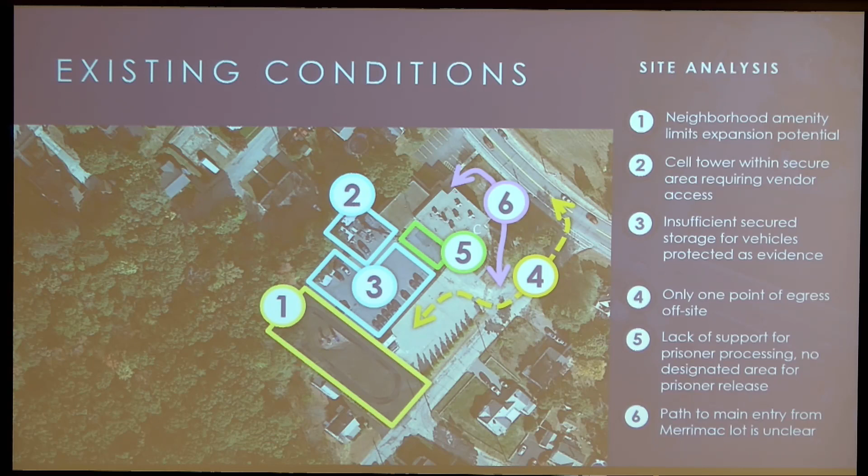But I think the bigger story here is about the condition of the building envelope. There's a document in our report prepared by our structural engineer expressing a lot of concern about the condition of the veneer. If you see the stone sign, the Bushee School sign, it's displaced from the vertical plane of the wall by a couple inches, and the masonry joints below are opening up. You also see evidence of the copper cornice pushed away from the brick, and cracking in a number of joints throughout the facility.

It's the opinion of our engineer that likely the header courses that tie the wythes of brick together let water get in, freeze, and break those header courses, so the veneer is no longer securely attached to the backup wythes. There's concern about the stability of that exterior brick veneer, and his recommendation is to do repair everywhere around the parapet, and in a lot of locations rebuild that exterior veneer and install new anchors to tie the wall back together.

Typically in these older buildings, you're looking at a three-wythe wall, three layers of brick deep, all bound together with header courses. In our case, it appears the outer wythe is no longer bound to the inner wythes, so that needs to be tied together. I'll point out there was a previous study, I think from 2007, that had already recommended the use of helical anchors to tie these walls back together. So this has been a problem for a while, and the displacement is concerning.

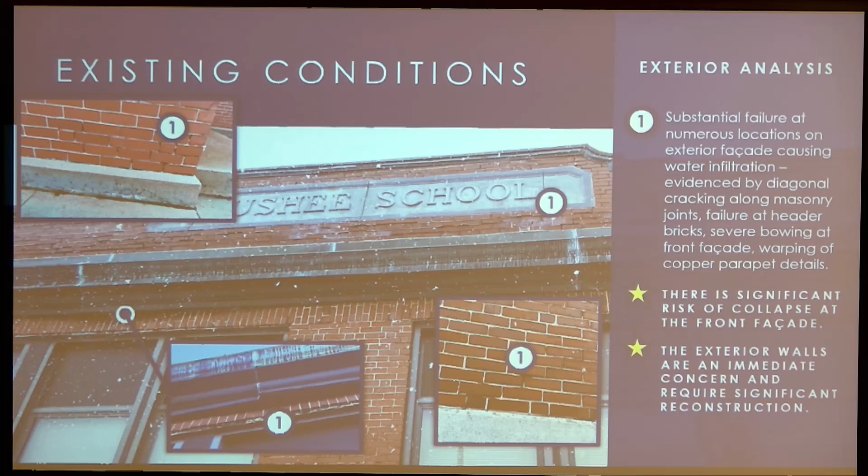Other envelope issues have to do with age and condition. You can see a mismatch of window conditions around the facility. There are aluminum windows that were clearly replacement windows at some point in the past; those are outdated and no longer meet current energy standards. Some other windows have been infilled, and we have single pane windows that aren't terribly energy efficient. We also see signs of rusting on some of the lintels, consistent with moisture infiltrating between the wythes of brick.

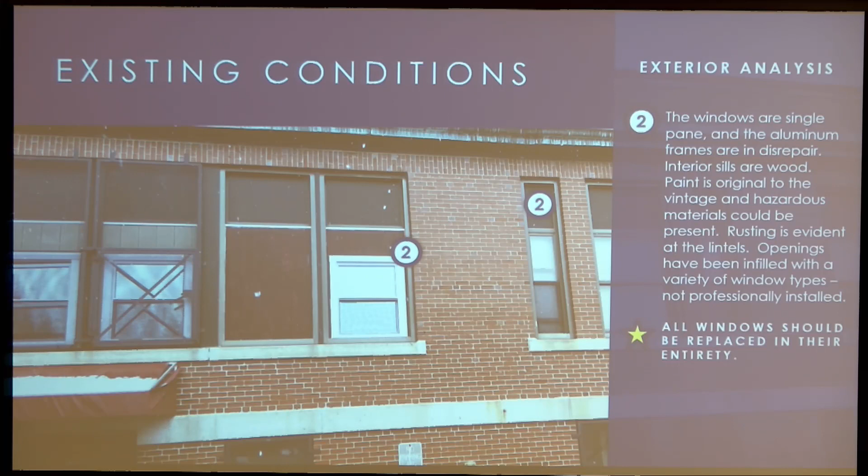We have interior wood window sills with a lot of peeling paint, and we see the same thing on some walls and ceiling locations, indicating moisture infiltration has occurred. When we get up on the roof, we see that at some point the rooftop units were replaced. You can see in picture number 3 where there was a larger curb that now has a smaller unit; these are still older units but clearly replaced in the past. There's deterioration in the gravel and roof conditions, and around the roof hatch you can see a fair amount of deterioration in the flashings, which occurs at a lot of the penetrations.

I leaned over where that Bushee school sign is, and you can see a lot of deterioration in the flashing and the caps along the edge there. You can actually see the displacement in the brick veneer pretty well from that location.

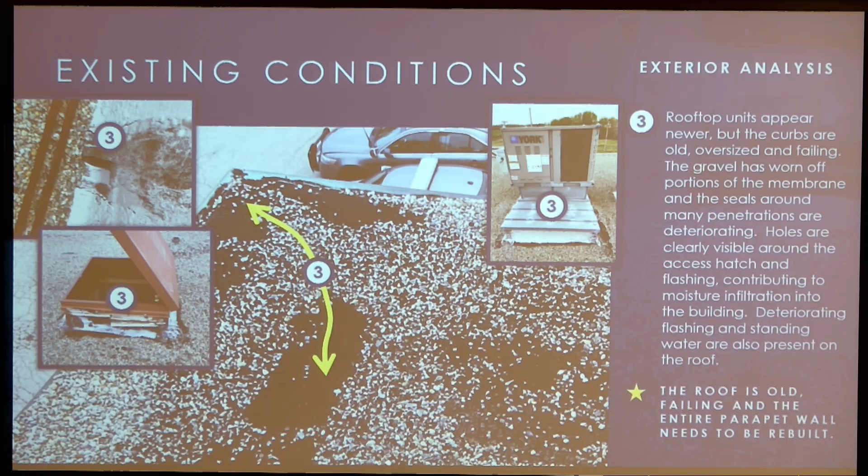So we're potentially looking at the need for re-roofing. We're looking at replacement windows. We're looking at masonry repairs. So there's a lot of work required on the exterior envelope of the facility.

Once again, getting on the inside, I mentioned that we do see signs of deterioration and infiltration from water. On the inside, in some cases, it just results in the peeling paint that you see in the one image. In the big background image, that is likely a combination of not only water infiltrating the masonry, but also site water up against the back wall.

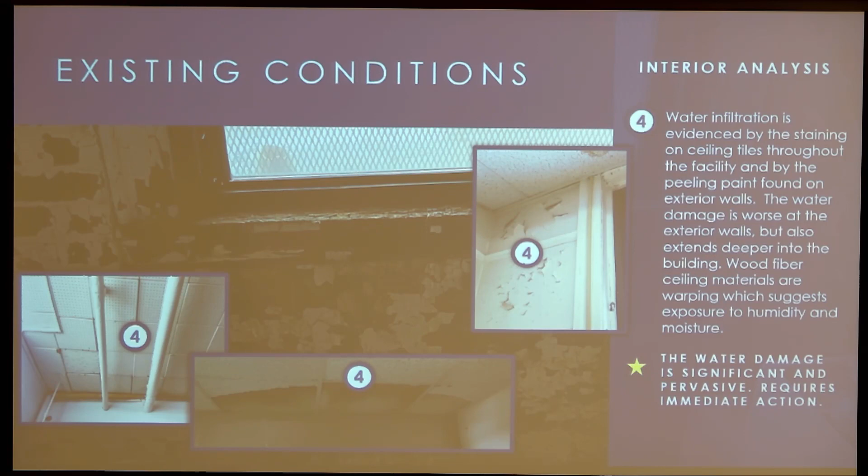So you see some pretty serious paint peeling on that wall as a result of all that infiltration. You see some big water stains on ceilings. You see the wood fiber tile in what is now the fitness room delaminating. So we've got a lot of indication of moisture infiltrating the building in the past.

We also see a variety of worn finishes throughout the building. There's one image of the chair underneath the dispatch desk where a previous reflooring took place, but now that is wearing through. We see some wooden door sills that are deteriorating. We see indications of vinyl tile over wood flooring where the joints are cracking and the tile is cracking. And then down in the lower left corner, we see some 9x9 tiles, which may indicate the presence of...

Yes, sir. Is the air quality okay in the fitness room? Is the air quality okay?

Throughout the building, there is some sign of moisture infiltration that could result in mold buildup. We did not do specific testing to verify whether that's present. The last one I was talking about, the lower left, is probably or possibly the presence of asbestos-containing materials in that 9x9 tile.

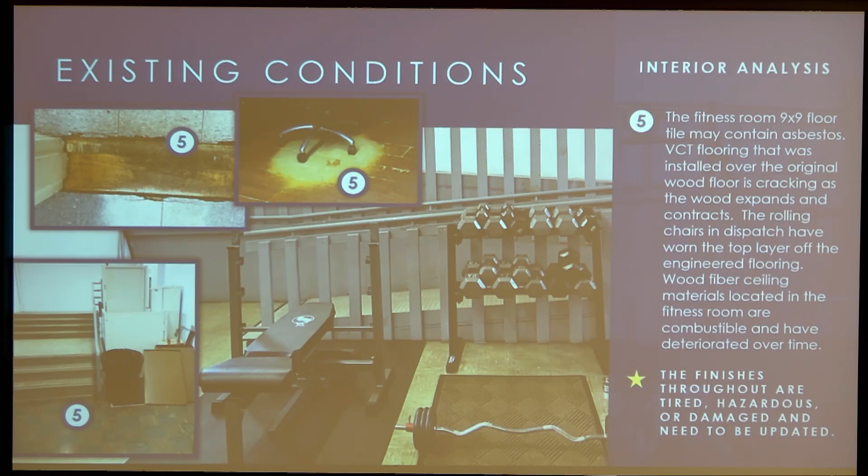In general, we see detention facilities that are older, and they don't have the kinds of provisions that we normally look for in terms of prevention of self-harm. It is unfortunate that many detainees, in the first 24 hours after apprehension, feel like it's a big blow to their psyche, and there are a lot more attempts of self-harm during that period. So trying to create a safe environment for officers to maintain that custodial responsibility is really important.

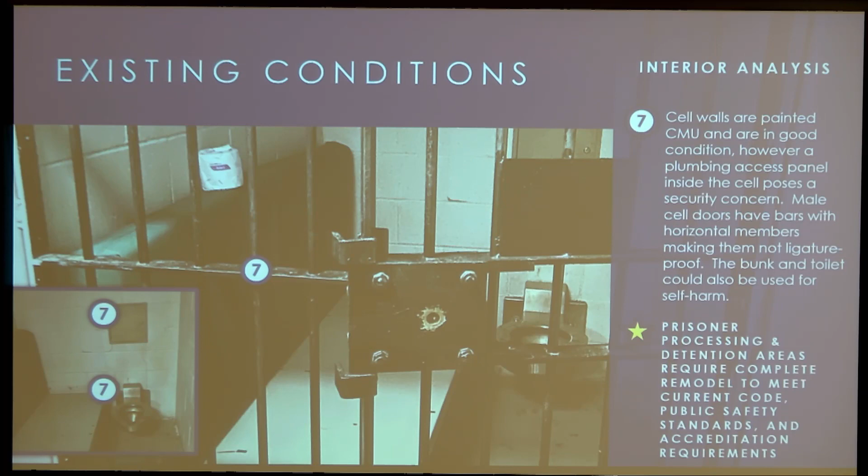All right, so some of the key takeaways: as the police facility stands, it no longer suits the needs of the department. And of course, I've outlined some of the challenges that the building itself faces.

We have some programmatic separation issues, particularly with the detention area. We have some challenges with building and site security, functionality of some of the spaces. Certainly ADA accessibility is a significant issue in the building.

We didn't outline it, but you walk in the front door and the first thing you're faced with is an up and down stair. And then that continues because there are several levels throughout the building that are not properly connected with either ramps or elevators. So ADA accessibility throughout the building is challenged.

There's concerns about officer health and safety, with some of the conditions we're facing with moisture infiltration and potentially hazardous materials. There's some building code issues that should be addressed, and certainly some efficiency issues that need to be addressed. Interior environmental quality, because of a lot of that moisture infiltration, is challenged. And then again, the prisoner health and safety, which translates into the custodial responsibility for the town, should be addressed as well.

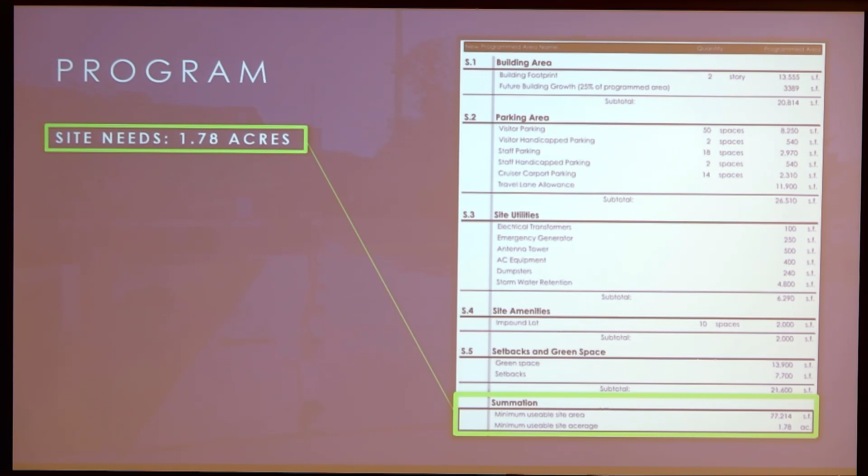The public areas, which is the public lobby and restrooms, access to an interview space, as well as the interior vestibule. We have training community space.

In your case, the community training room is also set up to serve as the municipal court. So it's larger than it would normally have been for just police function itself. It can handle the peak loads of the municipal court. So we've got those functions as well as some storage and kitchenette space to support that.

We have some municipal court facilities, which is the staff office and the judges' chambers. We have the dispatch center itself, and we program those to be compliant with NFPA standards for emergency communications centers receiving calls from the public, which calls for a specific level of protection against fire protection as well as security.

We have a records bureau, which houses all the records that the department retains, department administrative offices, investigative space, property and evidence storage - again, looking to fulfill accreditation standards for those requirements.

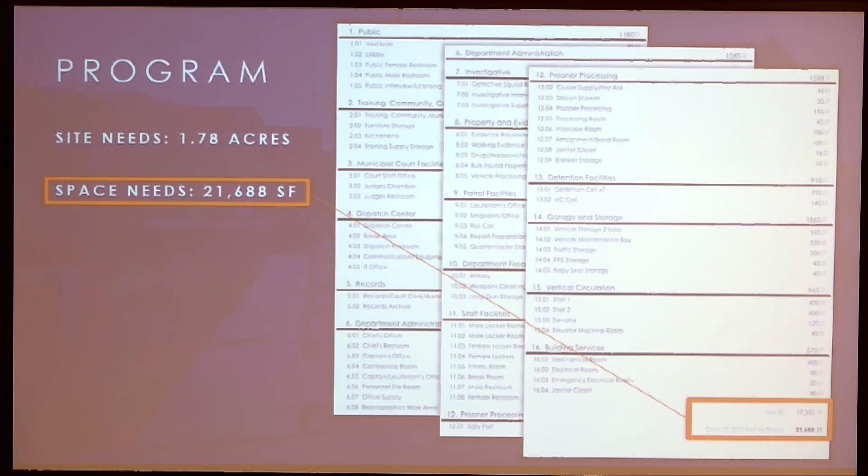It was not a part of our study to evaluate alternate sites, but we did have conversations with the police department about the location of the existing site within the community. And the chief has indicated to us that the facility, in his opinion, is located in an optimal location for the high volume call area.

So a lot of the calls for service are proximate to this site location, which makes it a great area for responding and putting a presence - police facility presence - in an area where most of your call volume comes from.

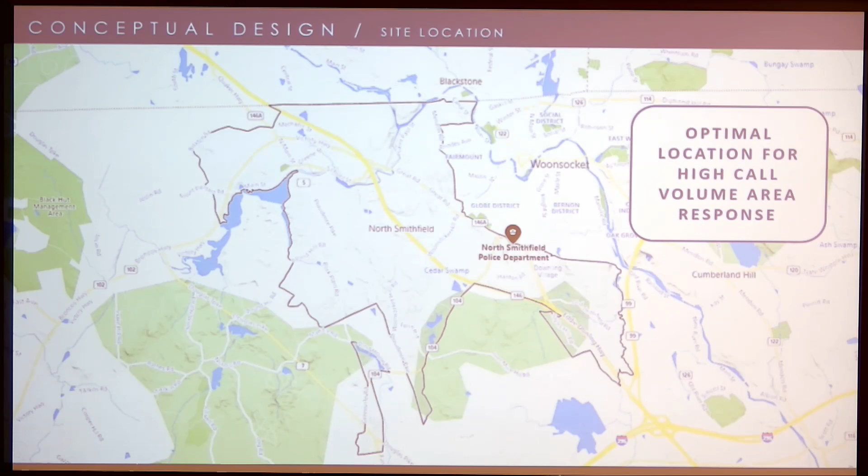All right, so now we're going to take our first look at the conceptual designs. This proposal is for the addition renovation.

The idea here is that we are going to retain the existing building and renovate it so that we can utilize that space. We did actually end up doing 2 additions to try to solve some of the programmatic issues. Right now your building is about just shy of 15,000 square feet. The program resulted in a need of 21,688, so we're a little bit shy of the programmatic need from a square footage standpoint for the existing building.

One of the things I'll tell you about existing buildings, particularly ones that are schools, is they're not the most efficient buildings to design a police station into. In particular, among other things, there are the widened hallways. They eat up additional square footage in the circulation category that isn't necessarily what we would have done if it was a purpose-built construction.

So our first challenge in looking at this site was trying to identify how to handle the vertical circulation. We wanted to address the public access to the building, and you can see up at the upper right of the page where addition 1 is - that is our main public entry.

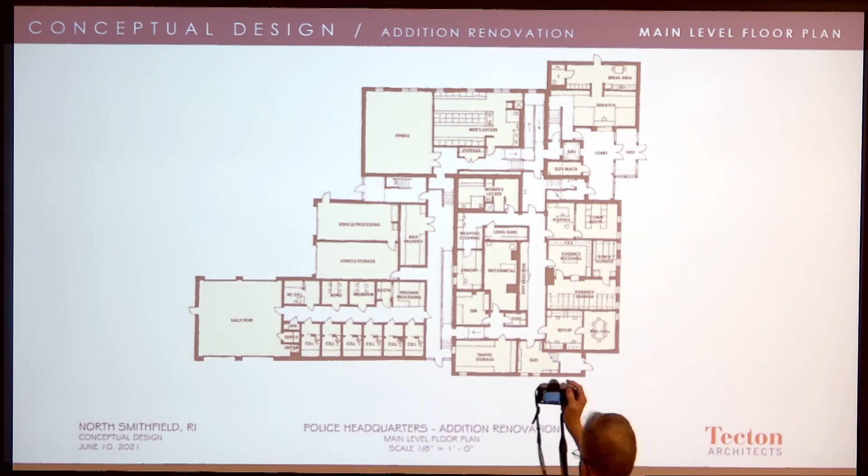This is a little difficult to see, so I'm just going to give you the general flow of it. Up in the upper right is our main entry with our dispatch area. The elevator is straight in off the lobby, bringing you downstairs to a mid-level, and then we have a ramp that drops you down to where the male locker room and fitness room are, in the back corner. Also from that half level, we have access to the women's locker room, which is in the other part of the basement.

Continuing down the page through that hallway, we have our patrol facilities and evidentiary storage down at the front of the building, and our roll call and report prep down in the lower right. Heading back, our mechanical and electrical room still exist in the middle of the building where they currently do, although we tucked the armory into where the current men's locker room is.

We do come out the back. We have to address that ramp that's too steep, so we flatten that out and continue up to get to grade with a longer ramp. And then the big rectangle at the lower left comprises all of our cell blocks as well as our sally ports. We have a 2-bay vehicle sally port so cruisers can enter, secure the doors, secure the weapons, and bring detainees into the facility in a safe environment.

And then just above the cell block are our vehicle maintenance and processing bays. One of these bays is for routine maintenance of the cruisers. The other is for when you have a vehicle involved in a crime and need to process it for evidentiary reasons — this space is not only to secure it, but to conduct that vehicle processing.

Up on the upper floor, if you go back to the elevator, you come up the half level. We have a secure public space on this upper level with a hallway that runs to the back where we create that municipal court/training room. We also have our public interview space, and public toilets are located at this level. Heading back, you get access to our records bureau, and then there's a secure entry point that brings you into the department administration, the investigative bureau, and then our patrol supervisors' offices.

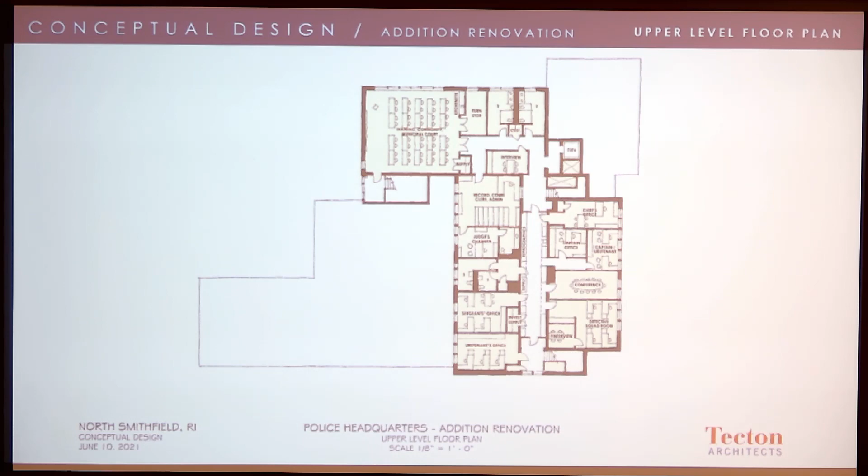So again, the challenges from the police department standpoint are that half level for dispatch, the fact that our supervisory offices are upstairs directly over our patrol functions below, and the need for all of that excess vertical circulation in the form of ramps. We could have solved that with a second elevator, but those of you who understand facilities maintenance know that a second elevator is a cost gift that just keeps on giving — there's maintenance, inspections, and all of that, which are quite expensive for elevators.

So this is a rendering of what this might look like, and you can see that we create an identifiable main entry over to the right of the image, and then complete the restoration of the existing building, trying to respect the historic character of the building and restore it as much as possible to its original aesthetic. The new addition complements it with a little bit grander entry element to identify that public entry.

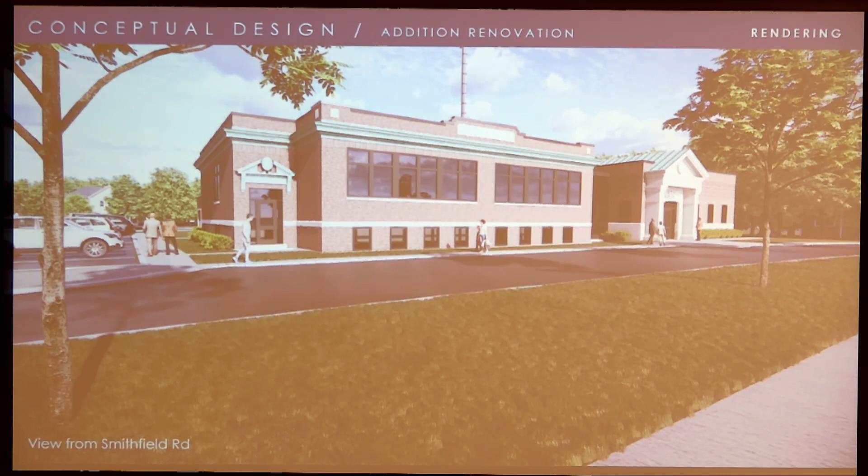Oh, did we go too fast for you there with that camera?

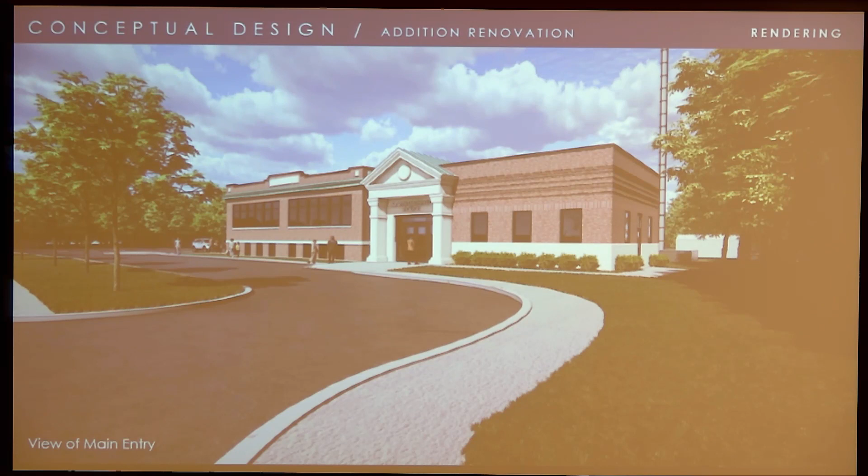Here's another view of that entry drive that comes in at the upper end of the site from where we were looking. You come right in looking at that main entry point. The parallel parking is off to the left where those pedestrians are walking by. You can still see that cell tower back behind our addition, along the property edge.

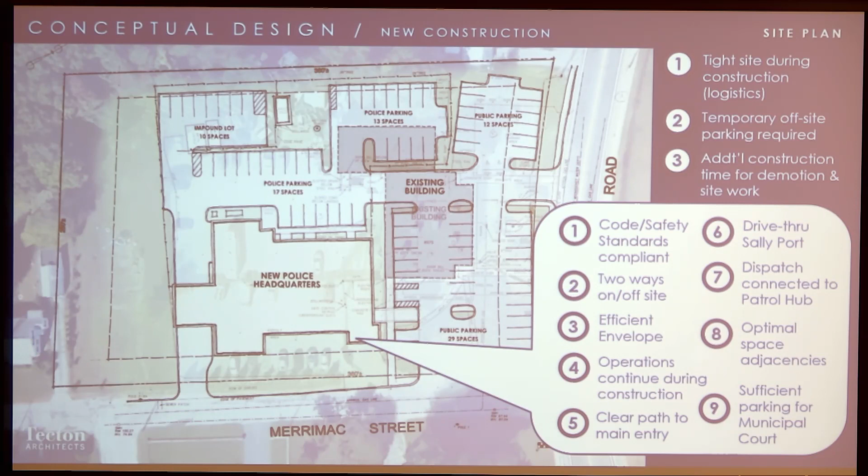All right, so now we're going to look at the second option. One of the big things we talked about here is... so on the last one, where would any handicap parking be? Can you take me back to the site plan, please?

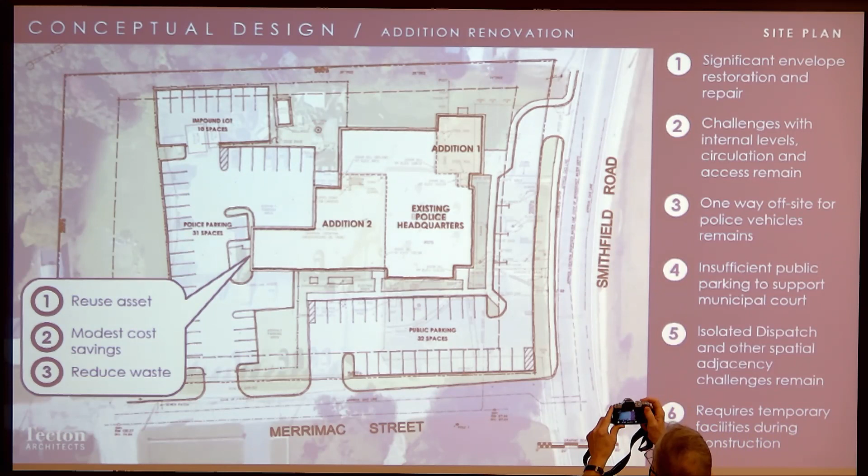So we have a couple striped out handicap spaces. We can actually get some closer to the front door. Our parallel parking can also be handicap accessible, and we can have a curb cut there.

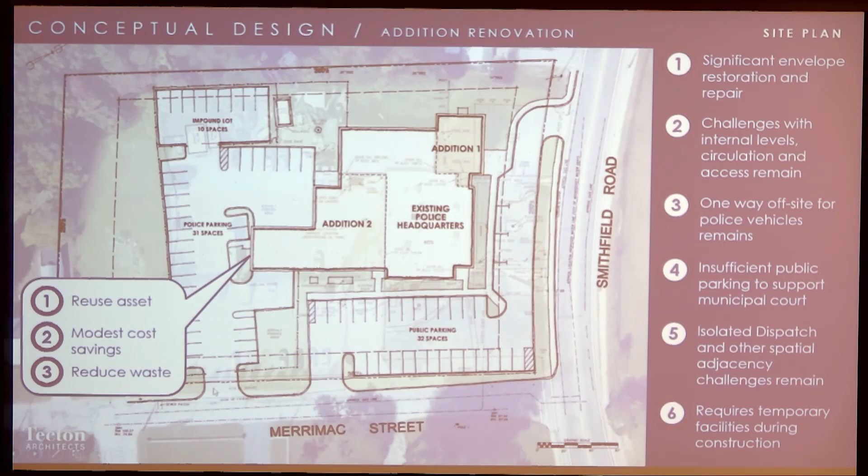Hi, so you're talking about potential Merrimac Street being blocked up on Smithfield Road. It follows up on the Councilor's question about parallel handicap parking. Would that not be an emergency exit or entry? Is it going to be wide enough to facilitate if cars are parked there? Can vehicles come in and out through the public parking space heading north towards Smithfield Road?

Yeah, that whole driveway is wide enough for two-way vehicle flow. We just didn't have quite enough depth there to get perpendicular parking along the front, so we retained just the parallel parking for quick drop-off and access to the building.

So if I was still on the addition renovation, may I ask another question? It's difficult to see, but there were two bays. One was for processing potential crime vehicles, and the other was for maintenance. That's correct. Currently, the town does maintenance of police vehicles at the highway barn.

I was just curious, if we're looking at costs, if they were to be maintained at that building, would we have to hire another mechanic? No, these are very small maintenance tasks, like headlights, windshield wipers, and stuff like that.

And who would perform that maintenance? The individual officers do, sure. Detective Steve Donner, if he's not there to do it, a lot of the guys know how to do it. Okay, thanks.

Any other questions while we're on that one before we start on the other scheme?

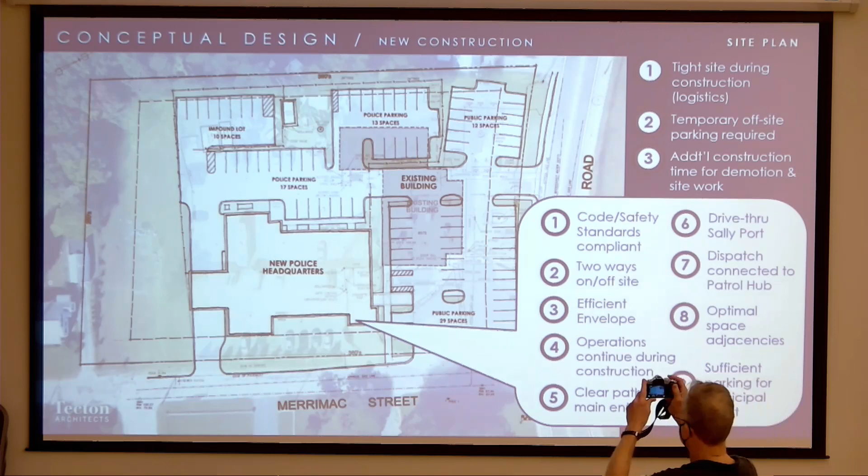All right, so this is the new construction option, and what we wanted to do here is try our best to make it such that the existing facility could be operated during construction, so that we didn't have to do a temporary facility. We're close to that, but there will be a couple little challenges for continuing operation.

Our prisoner access right now is through the back of the building, as I pointed out earlier with that green rectangle. So we've talked about other options for bringing detainees in during the construction period with the police department. That gray area is the footprint of the existing building. Rebecca, if you could just show us roughly where that prisoner entry currently is, right back there. During construction, we will have to reroute to either the other access point or the one at the bottom of the existing building image.

In this case, you see there's a more centralized access point with a perpendicular entry road that is wide enough to meet capacity for two-way traffic. We extend our public parking area all the way across the front of the site, getting upwards of 42 public spaces, so we get more public parking to support the municipal court function in this solution.

If you continue from the drive, you eventually come to a gate that allows access to the rear secure portion of the parking, where you'll have your police parking. There's a lot that jogs up above with additional staff parking, and then of course the impound lot Rebecca showed us a minute ago. The antenna sits between those two lots.

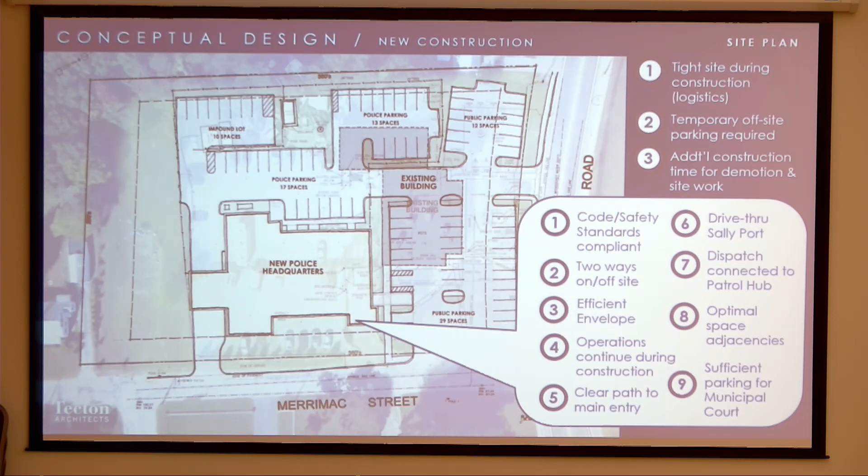There will be a little bit of additional construction time because you're going to build the new building, move in, and then go back and demolish the old building, and then finish all your site work development. So rather than building everything all at once, you've got to do it in steps. That adds a little to the construction time.

We were asked to address what's the possibility for future growth. I want to point out, through our programming exercise, we included growth inside the building. There are places where we have additional space for future needs, and certainly from a locker standpoint and a patrol standpoint, we've accommodated some future growth in the building.

So the idea that you may have to expand the footprint is a ways off into the future, but things can change over time. Possibilities involve the relocation, replacement, or removal of that park asset, indicated in area number 1. It could be possible to relocate the municipal court at some point and repurpose some of that space, or to consider acquisition of adjacent parcels.

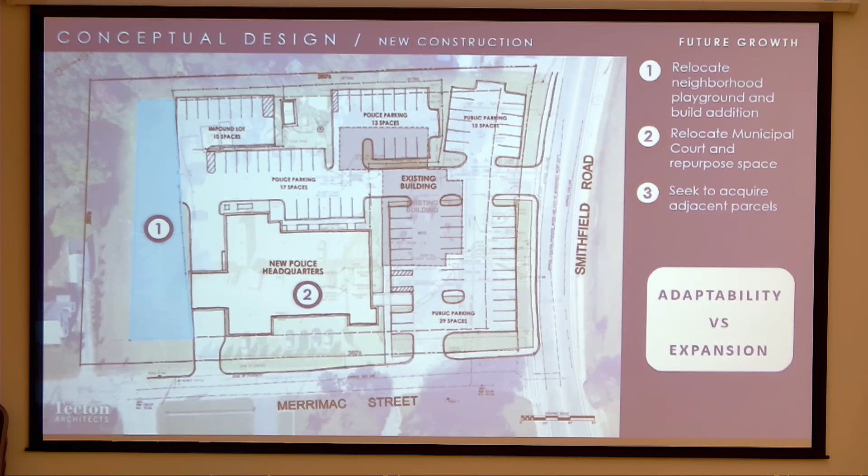Yes sir, just a quick question. Back when they were rebuilding the new state police headquarters for Rhode Island, what they did was put in double wides, right? They put everybody in double wides so they could knock down the old building and build the new one at the same time, and that saved a lot of time.

It would absolutely save time, but obviously you have the cost of the rental of those units. We didn't price this one using the temporary facility, but we could easily adjust that and figure it out. The cost might outweigh it, or you might save money in the long run since you're moving the project along a little faster.

Yeah, I mean, you know, I'm not telling you your job, it's more of a question than, you know.

My gut is they're going to kind of balance each other, because the cost of the rental for those temporary facilities for that extended time, you're going to have to locate them off-site. You have to have a place to house that for the interim, and make sure you have access to utilities. You are, however, going to save on the general conditions because the contractor, for all the time his trailer's there and his staff there, that has a cost as well. So we could take a look at it, but my gut says it's going to balance out. I don't think you're going to see a huge advantage, but I'm happy to run the numbers.

Yeah, well, if it balances out, and you get it done quicker, then it's a win, right? Yeah, well, I'm just asking, that's all. Sure, yeah. Thanks. You bet.

All right, so quickly from a floor plan standpoint, the main entry, Rebecca, point to that for me please. There we go. You have entrance through a vestibule into the lobby that has immediate access to the dispatch center. Dispatch center is supported by its break area and restroom. We have the elevator off the lobby and a stairway that feeds upstairs, and I'll tell you a little bit more about that when we get upstairs.

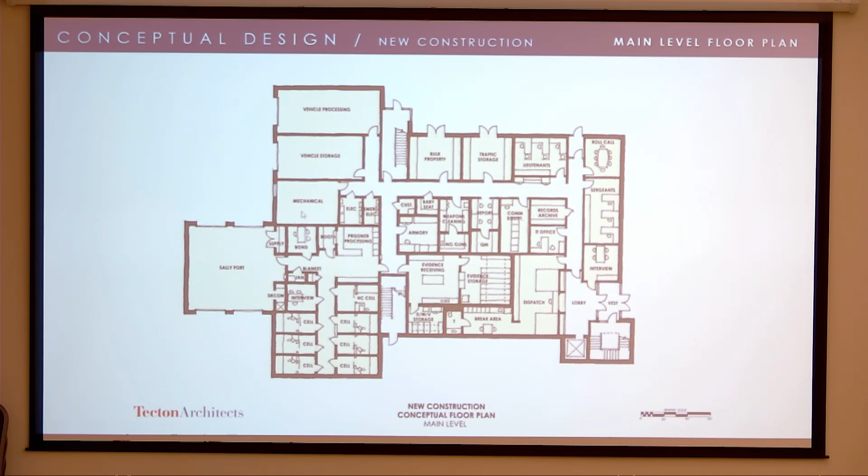So over in the lower left, our whole cell block with our detention cells and our processing area, our interview room, and then of course our access from the two-bay sally port over to the far left. Heading up above that detention area, you've got your mechanical room, and then the vehicle storage bay as well as the processing bay, maintenance and storage.

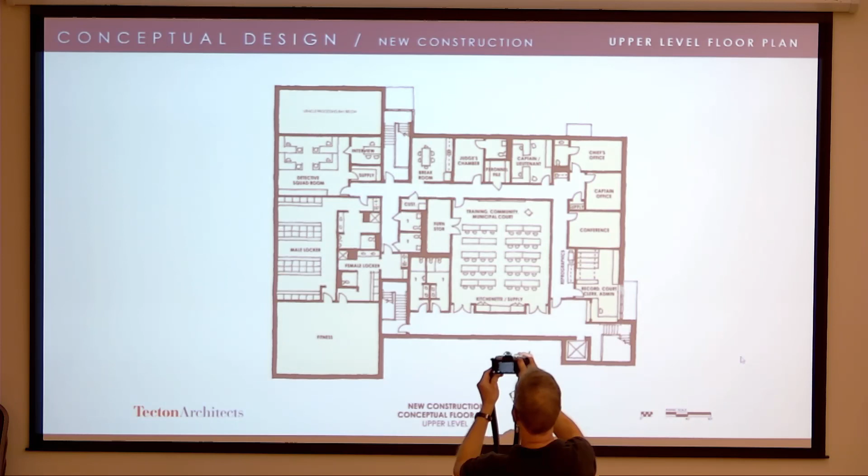If we head upstairs, once again, a lot of times what we like to do when we design police facilities is try to keep all of the public space on one floor. And if the site was a bigger site, that might have been a possibility here to explore. But because we were limited in the amount of area for the footprint of the building, in order to get a stacked floor plate, we decided that it was going to be necessary to get that municipal court up above, similar to what we did in the addition renovation solution.

So you come up the stair and elevator in the lower right-hand corner. You have access to the records office, which is also your court clerk's office. And then you have access into the municipal court at that higher level. And then there's public restrooms. There's sort of a gallery space that leads on to an egress space right there.

Just to note that this room is set up so that you can have public access when it's being used as a court space. When it's being used as a training room, you can secure those double doors to the public gallery, and police officers can access it from the rear corridor and use it for training. Vice versa, if it's being used for public space, then you secure that rear door and leave the public doors open.

So if we head past the records office and slide back, we get our administrative suite up in the upper right-hand corner.

Wrapping around, we get our judge's chamber behind the municipal court, and we get our staff break room next to the judge's chamber.

Continuing on the hall, we get our detective bureau, and then all of our locker rooms, male and female, and access to the fitness room down at the lower corner of the plan.

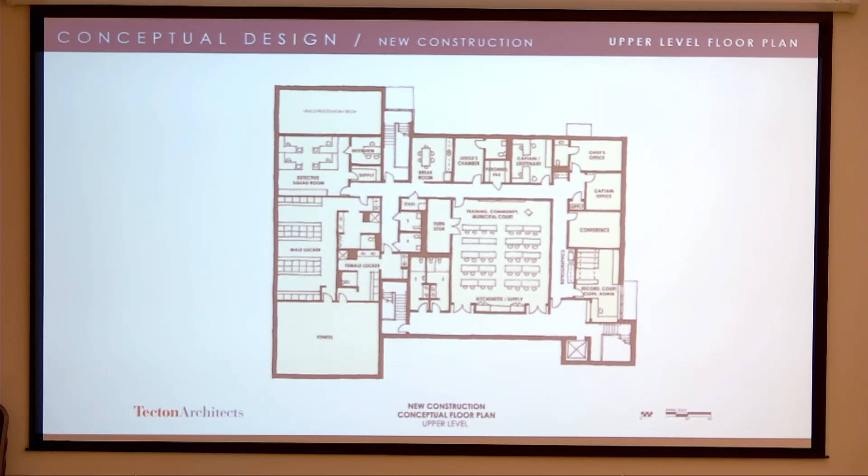We explored the possibility of retaining some of those copper cornices to pay homage to the Bushy School on the site, maybe use them as ornamentation on the building.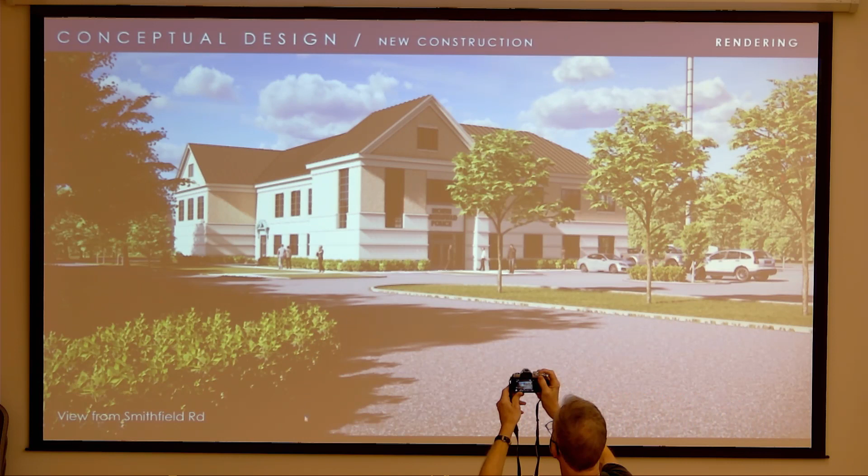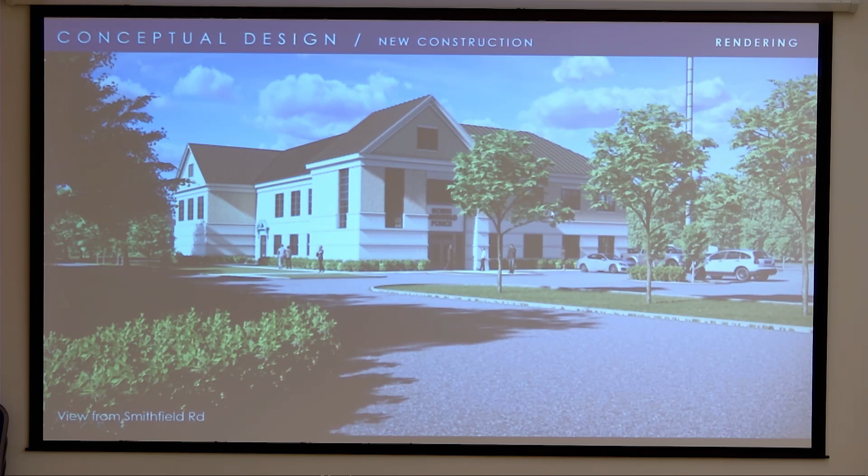If we go back to the right of the entry, our patrol offices are down below, and our administrative offices are up above. You can still see the antenna or the cell tower off in the back edge of the site there.

And there's a view from the other angle out near Smithfield Road. In this point of view, you can see the staff entry on the side, actually both staff entries on the side of the building.

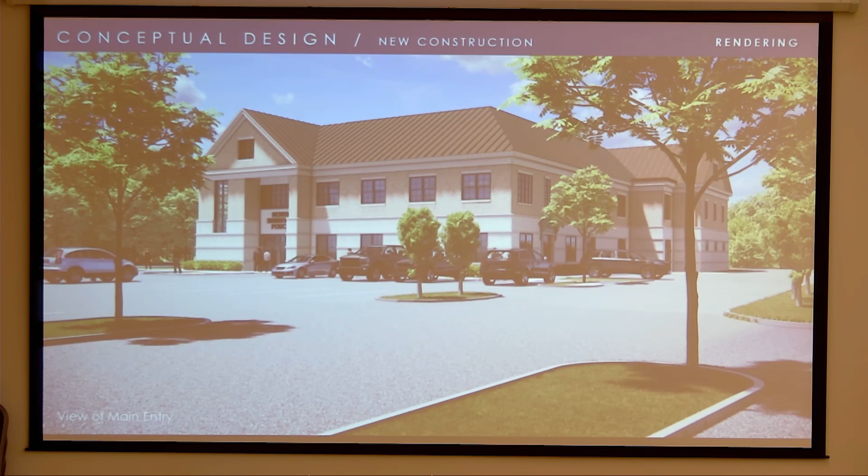All right, so now to the cost part. We're going to talk a little bit about what's going on in the market here in a minute, so I'm going to boil down to the gist of this here.

Certainly concrete and masonry are some of the key ones, but structural steel welds and all of that need to be inspected and tested during construction.